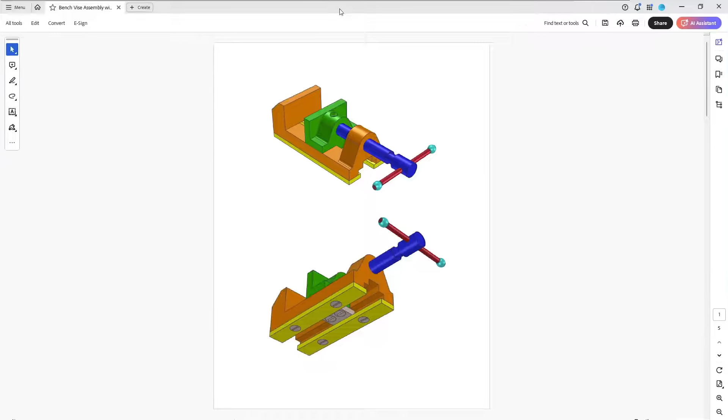Most of this is built in IronCAD without using any sketches, so we'll show you how to do that, and some things we will use sketches for, so we'll show that as well. This is a good overview video, and it's going to be fairly long since we're building each part piece by piece, showing you how it's done inside IronCAD's single scene environment to build it in place. Let's go ahead and get started, and I'll keep bringing this back and forth so we can see some of this.

First, let's start with our first part, the bench vise base here. We'll have some dimensional information that defines the overall size, the length and the width. We also have a chamfer in the back, and this component up here has some radiuses inside, defined by this angle value.

So we'll show you how we can do this in IronCAD. Let's move it over and put this onto another screen to use as a reference. The first thing I'm going to do is start with a drag and drop of our rectangular extrude here, and we can set the size of this—we know the overall length is 144, so we can just type in our values on our size box handles here.

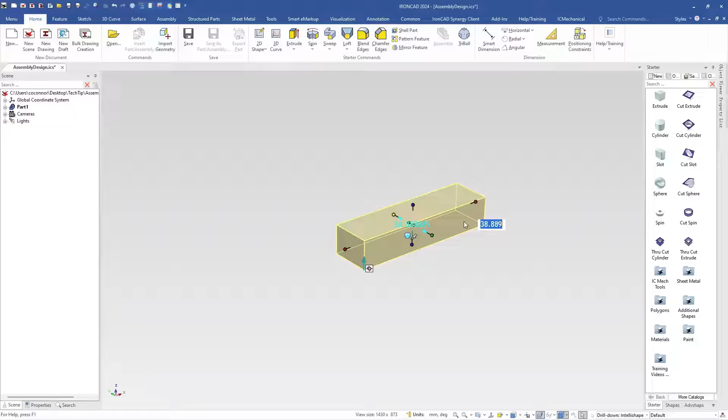These are our IntelliShape size box handles, and when you hit enter, it toggles over to the width handle, then to the height handle. So we're on the width now, and we know this has an overall width of 64, and the thickness of the base of this component is 16 millimeters, so we'll go ahead and set that as well. That gives us our starting point for our model.

Next, we're going to build this back piece here. We could again drag and drop another part, size it and snap it, but I'll show another alternative: we can select down to our face handles, where we have a handle that will start another feature which we can pull up and use all of our reference information, since we know we need to align to this back edge and to the sides.

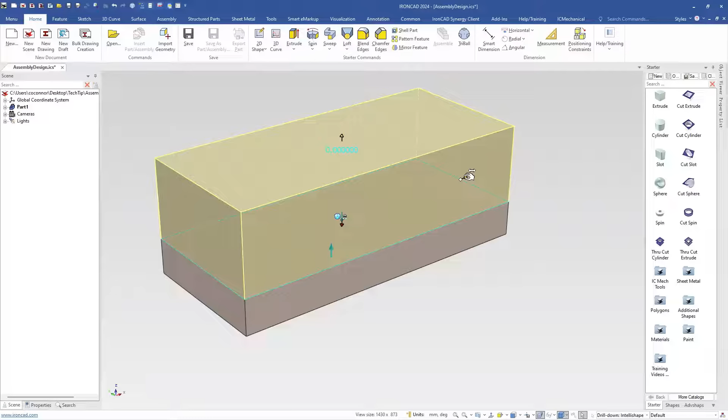We know the overall height of this is actually 36, so we can set that value, and we know our thickness is actually 26, so we simply edit the distance from point here and select 26. That gives us our second extension feature on our part.

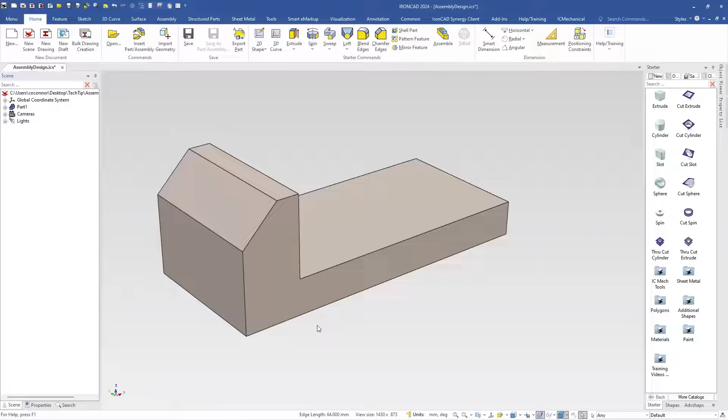We'll go ahead and add our chamfer to this, which is a 16 millimeter chamfer in both directions, so we can do a distance-distance. In this case, like I said, it's 16 millimeter and 16 millimeter. You can see the preview and hit enter to apply, and that gives us our starting point for our shape here.

The next thing we want to do is the component up here. A couple ways to do this—we can start with a cylinder shape, moving that up, and then adding some features, which is a good approach. So we'll go ahead and start with a cylinder.

We're going to snap it right here onto the center point, and we know it's going to go into this part at a thickness of 22, so we'll flip this to start off with and set the distance to 22. The diameter on that is actually 16 millimeter radius, so the diameter is 32 on that. And we know the height of this is going to be directly snapped to the same height as this.

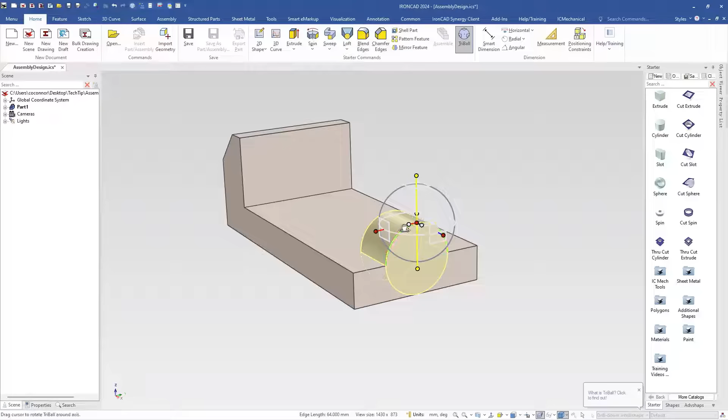So the top of this cylinder, which we're going to move using the TriBall, by just simply hitting our space bar, we can move this up to our top quadrant point, and then simply just snap this up to the top. That gives us our reference location for our shape.

Next, we can go in here, and our features, if you haven't watched some of our other videos, all of our features do have cross sections in there. So you can actually edit the cross sections by right clicking and selecting edit cross section, or hitting Alt E. It'll take you into the cross section mode.

What we want to do is draw our two lines here and put our angle information on this. So what I'm going to do first is lock this guy into position, so he doesn't move when I make any changes, and we can just draw our angles here.

To do that, we can just draw 2-point lines, or we can use another tool here, which is a tangency line. What we're going to do is draw a tangency line down through this point here, and we're going to trim those off and basically get our final line.

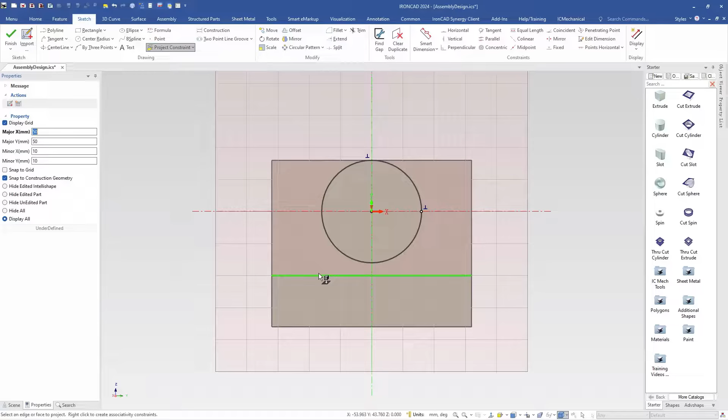So a couple things we can do. First, let's go ahead and reference this edge down here so we know how far to drag down to. And what we're going to do is draw this tangency again. We're going to select the arc, and we know we can just move this around to get whatever tangents we want.

We don't know the length of this, but we do know the angle for this thing, so we can right click and type in the angle for this. In this case, it's got to have a total of 50 on both sides of those from center to center. It's from this angle to this angle is actually 50, so it's just a calculation there. It's 25 minus the other side, so we're talking at 65 there onto that.

So then we can do the same thing onto the other side here. Again, we're on the tangent command still. We can pull that down, and it's going to maintain that. And again, we'll go in here. On this, it gave us that angle.

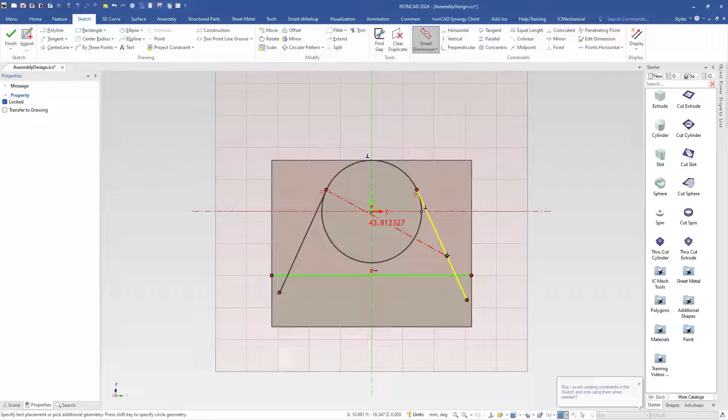So we're just going to put on the 90 plus 25 on that one, which is the 115 inside there. So if we wanted to get an angle dimension, we can put that on there to get the 50. If we wanted to put the lines down at whatever random angle, we could use a constraint dimension to drive those as well, so that's an alternative. But anyways, I'm just doing some math here to give our angles.

And now we basically have our shape, and we can just trim out what we don't need. So we're going to use the outer part of this geometry here, and get rid of all the extra lines that we don't need. And we're just going to hit finish, and that will give us our shape.

Lastly it had on there was a fillet on these corners here, and I believe, let me double check, that is 3 millimeters. So we're just going to right click, type in 3 millimeters for that, and we can come over and get the other side as well and enter on that too.

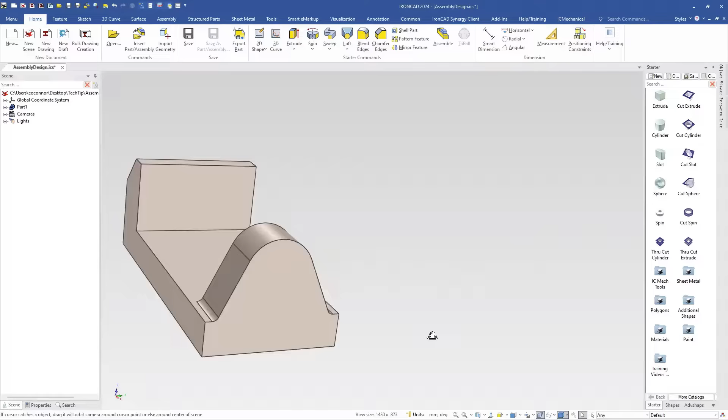So now we've got our base shape here for our model. One thing it does add to this is a hole here on the end, which has a diameter of 16. So we'll go ahead and drag and drop that out onto our center point. It has a diameter of 16 on that one, and we can leave it the length it is, or just snap it to the end. Either one will work in our geometry.

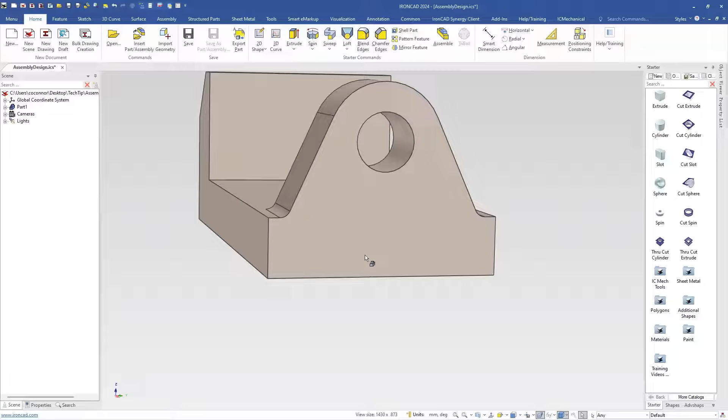So that gives us our starting point here for our model. Lastly, there is actually a cutout here on this end. So we can do this similar to the way we did this one, where we can drop a shape, edit the cross section, and make basically a two cut shape, or we can just use two drop features. For example, I'll just use an extrude cut. I'm going to drop right on the center, and that will get us all the way through our model.

I'm going to line up this bottom so I know my overall height. The first one on this is actually 7 millimeters high, and the width, if we right click, we can do a symmetrical sizing, is actually 32. So we got our first hole with that distance there.

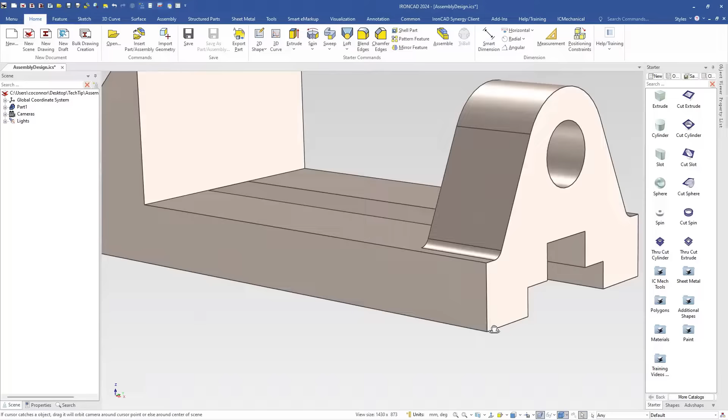We'll go ahead and add our next hole using the same extrude cut inside of here, and drag and drop that one on there. Again, referring to the bottom edge since we know the overall height is 16, we'll set that to 16, and the width on this one, symmetrically dragging with the right click, we'll set to 16 as well. That gives us our cut through there. So that's kind of the base of that model.

The last thing it adds is some holes onto this part, spaced out 38 millimeters from this end, and then 70 to the next hole placement. This is actually just a simple hole, and we can do this multiple ways. It looks like it's got a little angle on the bottom there. It doesn't give us information other than it's a 6 diameter hole, so I'm going to use some of our IronCAD mechanical tools.

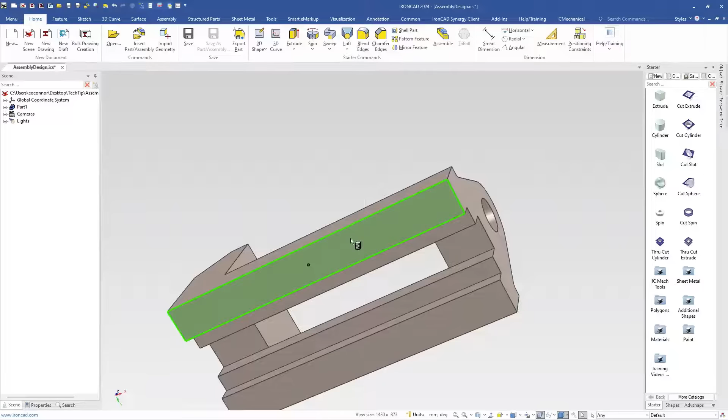I'm going to drag and drop this out, and again I can drop this anywhere. I can drop it onto this point here, and we're going to use a hole feature into this. This is going to be just a simple hole in this side, and again it's 6 millimeters, so let's put 6 millimeter inside of there.

If we want to have a flat hole we can do that, or we don't want this to be through, we'll set a depth instead. The hole depth on this guy is actually 10 millimeters, and we'll give an angle at the bottom, I guess we'll just leave 118. They didn't really give us any size there, so we'll use 118 as a default, but we have multiple different angles we could set, we'll just use that one as our point of reference. Once we've got that done, we can hit OK.

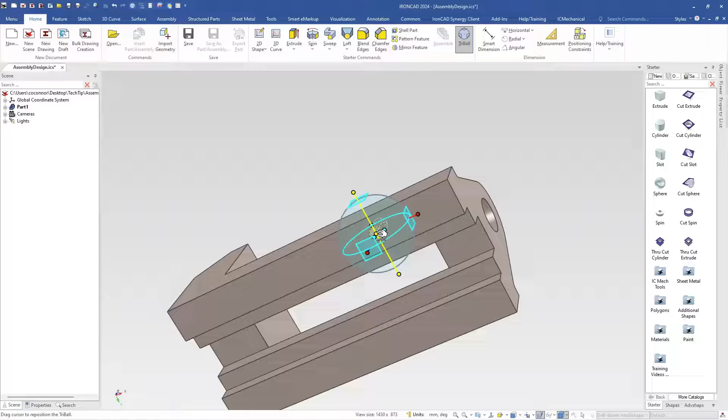Notice it already puts the TriBall on for us, and we can simply move this in 38 millimeters on that model. Since we dropped on the center point there, we're already on the center point of that face. But the reference dimension they gave us is actually 10 millimeters from this edge, and then 44 over there. So to refer to that, if we wanted to say how far are we from this actual edge, we're at 8, so we'll set that to 10 millimeters to set that offset. That is our location of our hole in there.

We'll go ahead and make another copy of this, and what we're going to do in this case is make a linked copy, so it's a linked reference geometry. If we make a change to one, the other one will change as well. It's got a 70 millimeter distance from center to center.

Next we'll select both of those holes using our shift key, and again we'll right click and drag this to make a linked reference of that, and it's got a distance of 44. So that's how we can create that base plate.

Using IronCAD's drag and drop feature, this is just a simple part design, and again this is our base, so let's go ahead and name that as our base part here. Next we're going to go ahead and build the next shape to this.

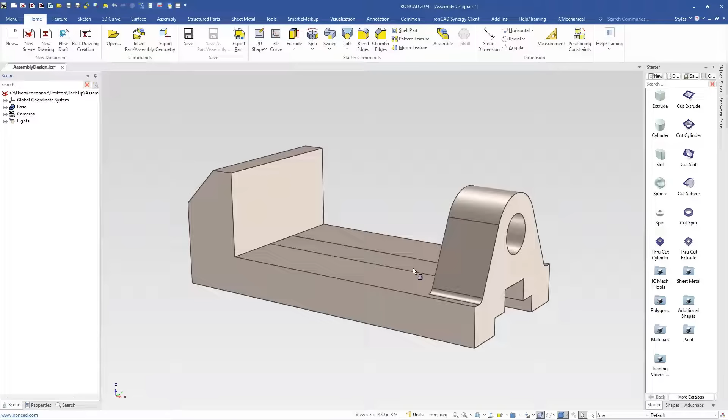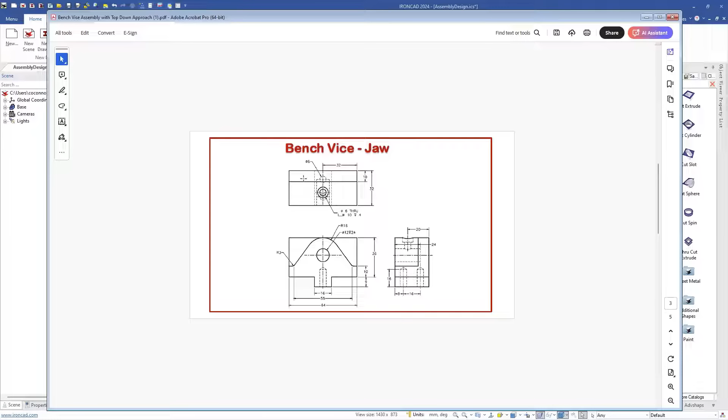We'll move this back over so you can see. We're going to go ahead and build this jaw feature inside of here, using a lot of the existing reference information and just adjusting some things to get that. So it's got basically the same arc shape that we had before, but it's got a flat plate back here on the back, and it's got a hole at the top and on the bottom of this part. Let's go ahead and move into that design.

What we want to do is reuse this existing geometry inside of here, and to do that we're just going to start a new extrude command, and we're going to create a new part right off of that face there.

The thickness on that originally is going to be 22, but the total thickness of this guy is actually 32. So let's go ahead and set it to 32 for the extrude distance here. There we go, hit OK to place that.

Now this is a separate part since we created that, and we can just use our triball here again to move it off, it doesn't really matter where it's sitting at this point. So we'll move this off that back piece so you can see these are two different parts. We'll go ahead and name it so we can distinguish them. This is the jaw here as well on that part.

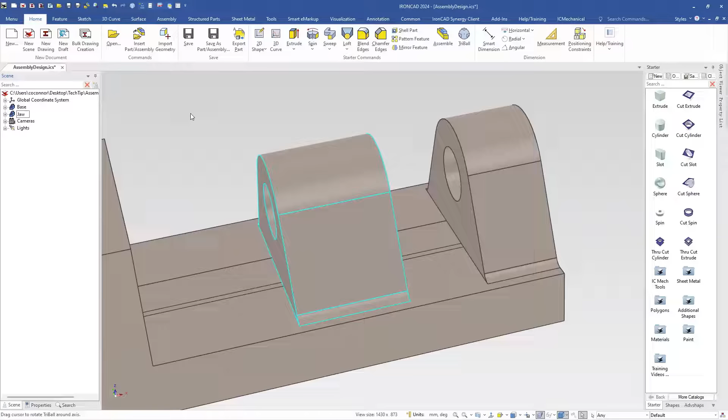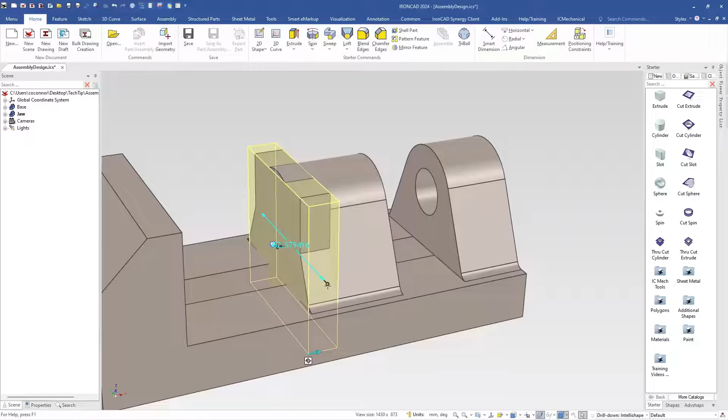One of the things it has, as I mentioned, is a flat piece on the back here. So what I'm going to do is drag and drop an extrude feature on here and flip it in the opposite direction, and it's got a thickness of 10 millimeters. Now the width of this is 64, so we can right click and drag this out, and it's 64 inside there, so it's essentially aligned up with our other part as well. So we're going to snap this up, basically create an alignment.

Now we've got that back piece here. The height of this object is 36, so again we can use our handles. It's probably the same height as the other one, so we can just snap, or we can type in 36 to be precise, either way will give us that. So now we have that shape there as well.

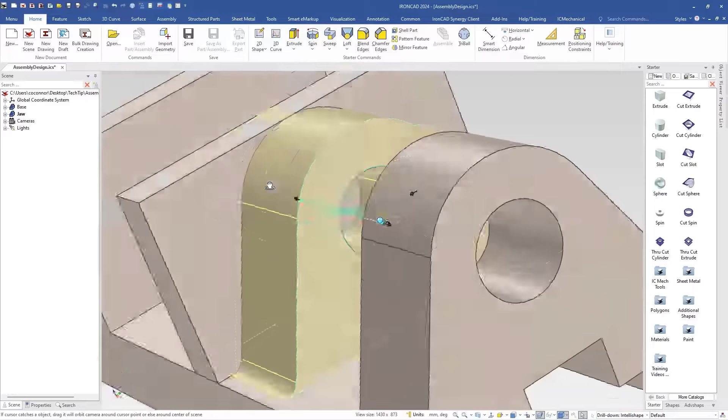This one's got the same diameter on the top, but a different hole. So we want to change this inner hole here, it's got a different diameter, so we're going to edit distance from its own center point, and it's got an 8 millimeter shape there, going to a 12 diameter. But we can't really edit this one because it goes all the way through to the back side. Let me cancel out of that. What I mean is it goes all the way through to our original shape, since I added this material here.

So what I'm going to do is get rid of this particular hole and drag a new feature onto it. To do that, I can edit the cross section by going into Alt E, and we can hide all the geometry so we can see our sketch. We don't need that hole, and we hit finish to get back to that. So now we've got it there.

Now we can drop our hole here that we want, which is going to be a diameter of 12 and a depth of 24 on this. So we'll go to our depth by hitting enter a couple times. There are back handles yellow, so we're driving that back one at a depth of 24, you can see that's 24 depth there. So that places our hole 24 deep at a 12 diameter.

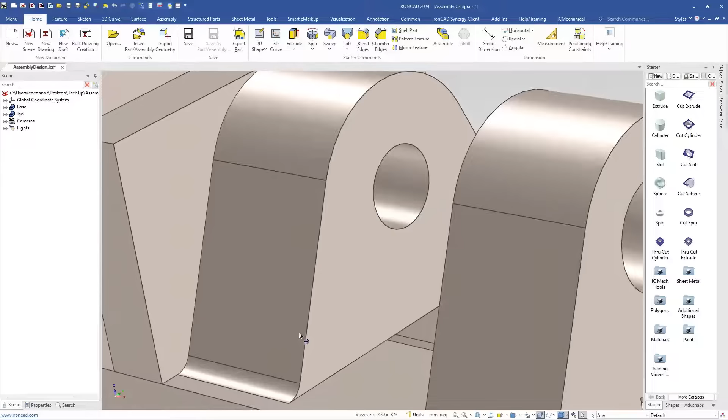These blends here are interesting. So our model, when we first built this, was off this face and went all the way down to the bottom face. In this case, we're actually going to add some geometry to this part, since it actually has a 10 millimeter base, and this is going to put the blend up here on the top. So we can either leave those there, cut it off, whichever one you want, but we're just going to add another base element to this.

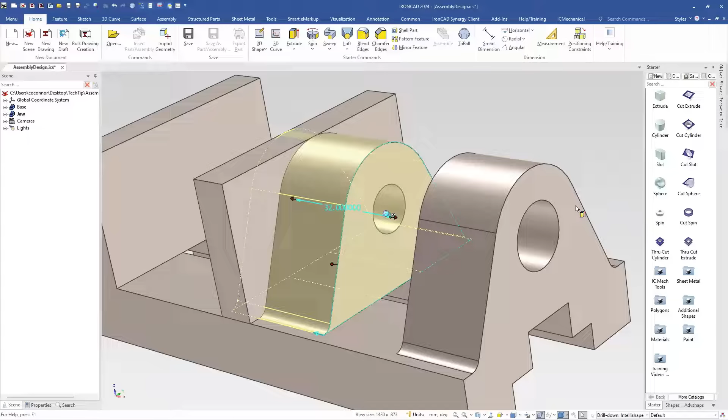Let's go ahead and drag and drop another feature. I'm going to put it right on the center, line it to the bottom, and set the height of that to be 10. The width of this is going to be aligned to here, so I can just snap to our side, and now I can pull these in to our models and snap to the existing geometry here.

We could have done an extrude like that and drawn a rectangle and extruded it, easy to do that as well, but we just did it a different way, and it didn't really matter to us. So we're just going to go ahead and put our blend on here again, it's got a 3mm blend on both sides of that.

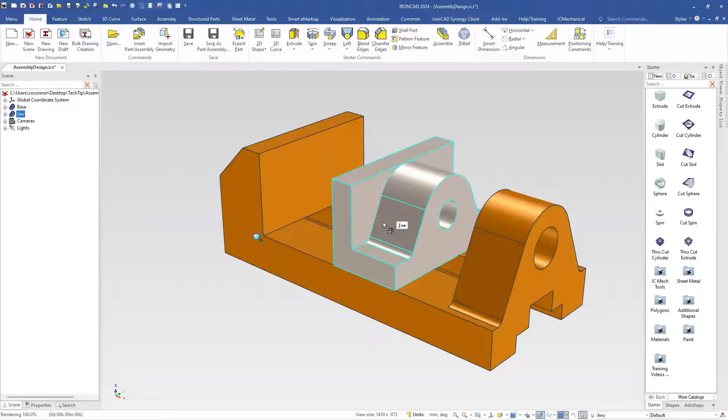And we can hit OK. All right, so now we've got that part. I'm going to change these colors a little bit. Now that I'm looking at this, it doesn't look so good to have them both the same. So our base part, I believe, is going to be an orange part here, and we're going to be working on a green here. Let's go ahead and change that one to a greenish color so we can see this a little bit better. Now we've got this model basically created here.

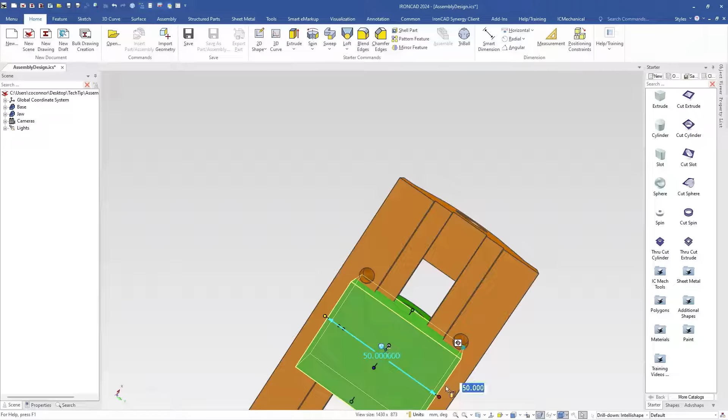We have a piece in the bottom that we need to build, so we're just going to rotate down to the bottom of this, and on the base of that it's got a 16mm wide slider here. So we'll just go ahead and drag and drop a feature right onto the side here, and it is 16mm wide, so we'll change that to 16mm, and we're going to snap it to the overall length of this model as well. So we're just going to right click and drag this in, hold our shift key down, and snap to that face.

There we go, so now we've got that set there. We just need to set the depth on that, which is 9mm. So we can go in here, grab our last handle, set it to 9. Okay, so that gives us basically our shape, and now we're going to put some holes on here.

So it's got 2 holes onto this shape. One from the front here that's 8mm back, then a 16mm inside of here. So let's go ahead and do the same thing that we did before. We're going to go ahead and use our mechanical tools. I'm going to drop that hole onto that center point.

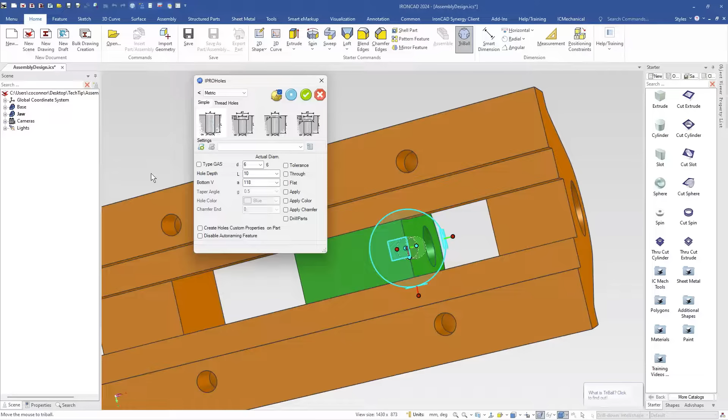In this case, this hole, let me find some information about these holes. I believe this is... yeah, I guess these are 6 again, a 6 diameter hole. The depth of those is 10 in this case, and again it doesn't give us the angle at the bottom, so we'll just go ahead and create that hole.

And again, this is going to be moved off at a distance of 8mm, and we want to create another one, a linked copy down here that's got a distance of 16 from that first one. So that gives us our 2 holes there on the bottom, and last, it's got a hole in the top here.

So the last one, this hole in the top, is going to be a counter bore hole. It's got a 10mm counter with a depth of 4, and a 6mm through hole. And the through hole means it's going through here.

So we can just set the depth here to the center point of this, which, you know, we've got a 12mm, 16mm, just move it to 16mm, we'll be cutting the hole through. So what we're going to do is just drag and drop again mechanical holes feature out here.

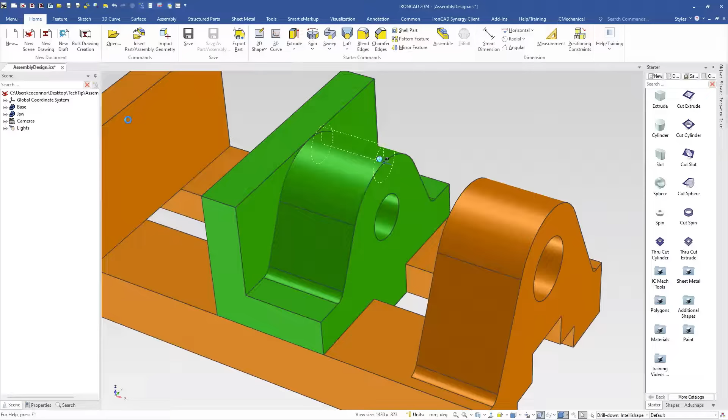I'm just going to drop it onto the center point here, then I'm going to move it after the fact. So we're just going to drop that, and it's positioning the wrong way, but we'll move it with the tri-ball, that's fine. So again, this has got a 6mm through.

That's going to be a depth of 16, and actually we're going to do a counter bore, so 16 inside of here, depth on that, and we're going to go ahead and set the counter bore. It's got a counter bore diameter of 10mm, and the depth is 4 for that. So we're going to just type in those values there: 6, 16, 10, 4.

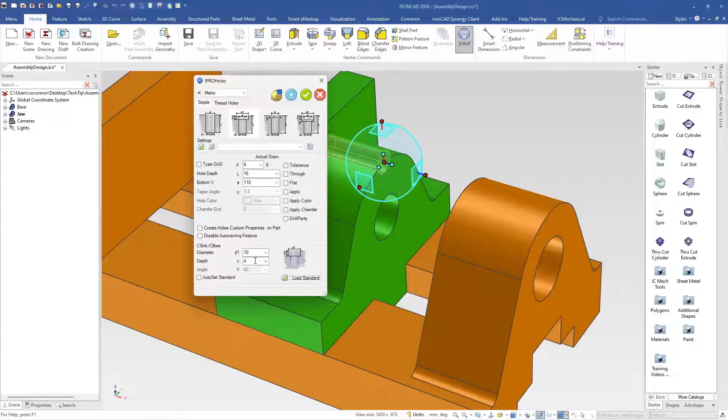Hit OK to apply that, and what we're going to do is simply rotate this over 90 degrees and move it in. In this case, it's got an offset of 20mm from the back side of this model. So again, we can just use our tri-ball at a distance from point from our back edge, that's going to be 20mm from there. So that kind of builds that part there for us.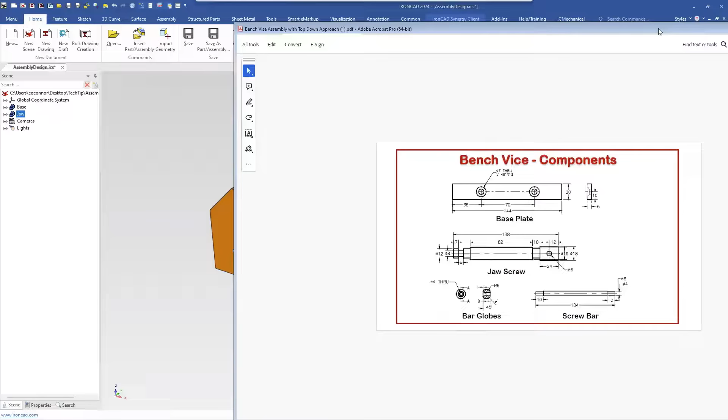So that's another way to build in place inside of IronCAD. We've got the 2 parts here, and next we'll just hop over to our next part here, which is some components. So we've got a couple different ones. One is these plates on the bottom that we have to build with some holes on them, and then we've got our bar globes and screw bars. So let's go ahead and start with the base plate. Fairly simple to do here.

Sorry, messing with my second screen. So let's go ahead and hop over to our bottom side here.

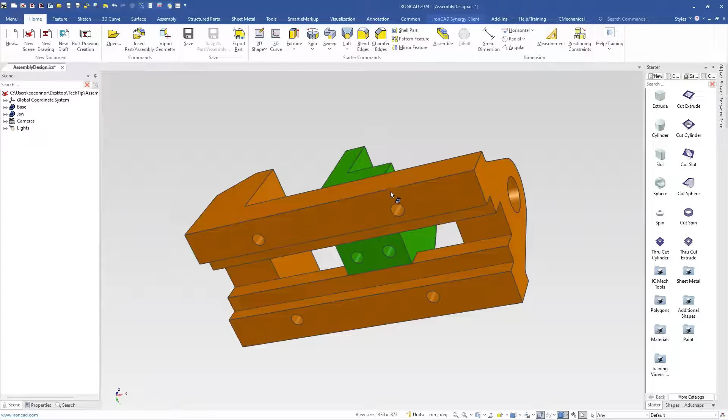We're going to use this existing geometry inside here, so we can reuse the holes if we want. In this case, we're going to modify these since there's actually a countersunk hole on it, so instead of reusing the geometry, I'm just going to drag and drop a new part out here.

I just drag and drop it on here, and notice that when I drop by left click, it adds it to the feature. So if we want a new part, we right click and drag and do the same thing. We say IntelliShape feature - oh sorry, wrong one - drag and drop and select drop as an innovative part.

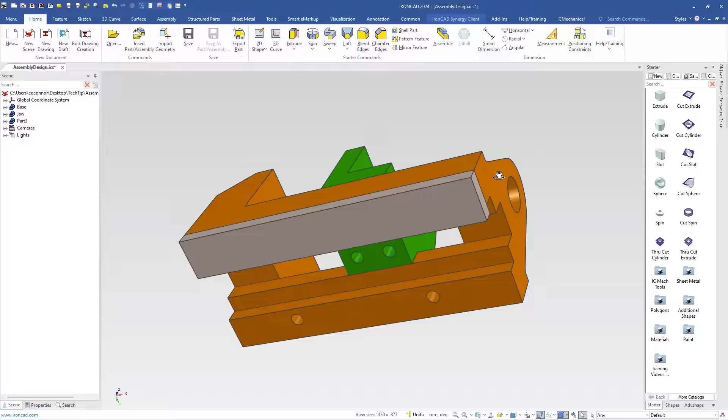So now we have a new part, and it comes in a different color so we know it's not part of that feature anymore. Now I can just use my handles to align this, and we know the thickness of this is 6 millimeters. We know the depth from this is actually 20 inside there, so it does extend beyond this inside there. That's why we built it separately to begin with.

Next we're going to drag and drop our holes on here to build this, and it's got a 36 and 70 spacing inside there. So let's go ahead and drag and drop that out onto our model. Does it give us any centers? I guess it's just in the center of the model, doesn't really matter.

So we're going to go ahead and do our mechanical tool, drag and drop it on here. Again, this one is actually going to be a countersunk hole inside here, and we know this is going to have a 7 millimeter diameter. It's going to be through on that, and we're going to set the angle and depth on this one. We need to know the angle, they say it's 45, so we want to set that angle to be from - in this case it would actually be a 90-degree angle on that - and the depth on that is 3 millimeters.

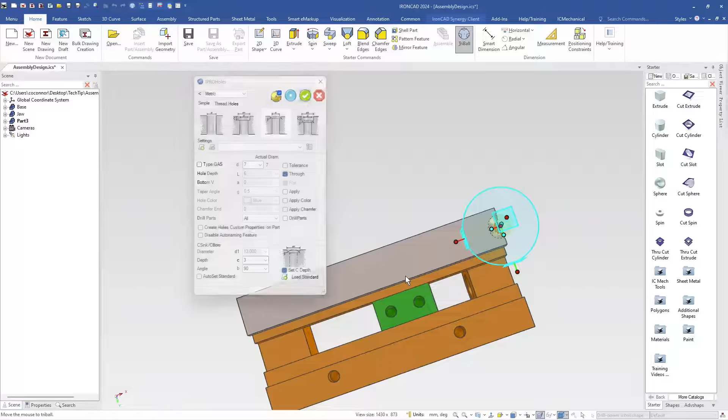So we're going to go ahead and set that for this, hit apply to place that, and then we can type in our values. We can just do the values here, or we can just refer to existing geometry. For example, I'll zoom in here a little bit so you can see this.

So what we're going to do is align to this hole, because we know this is the same hole on the opposite side. We can just drag this over, hold our shift key down to snap to that center point and move it there, so we're just moving that hole that exact distance.

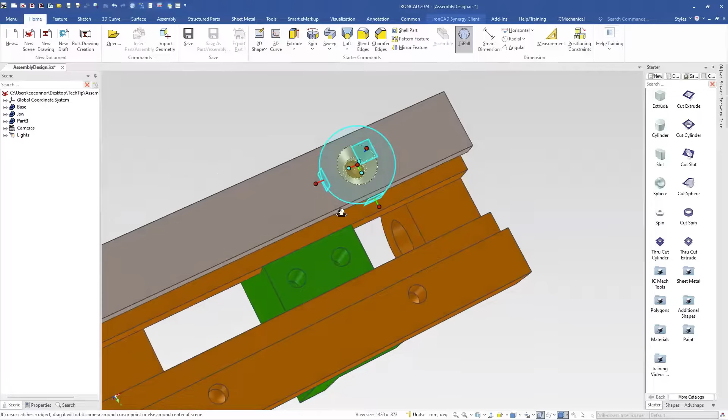Now we're going to do the same thing to the other hole. Again, we can right click, drag, get to that center point, or hold to the edge with the shift key to get that center point. This time we're going to say link when we right click and drag that - we're going to link that at 70, so that's the 70, and that was the 36 to give the first one. So we didn't have to type any values, we just referred to existing geometry to create that.

Next we need to create one of these on the other side, so we'll just make a mirrored copy of this. We can do that with a mirror feature command, or we can use our triad to position this here on the midpoint of one of these edges, right click on one of our orientation handles in the axis we want to mirror about, and make a linked copy to the other side. It's a very simple way to do that.

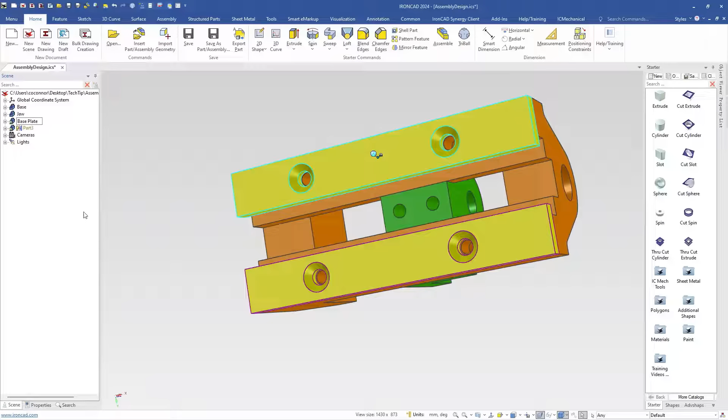Now we can select both of those and actually change color on those as well, make those yellow, and this is our plate. Let's go ahead and make that the base plate inside there. Since they're linked, both of them will update, and it also tells us that it's a mirrored reference of that part inside there. So now we've got our base plates on there.

We've got that one done, and next we are going to go ahead and do the jaw screw. I'm going to put the jaw screw out in space, and then I'll position it in here so we can build it and then move it.

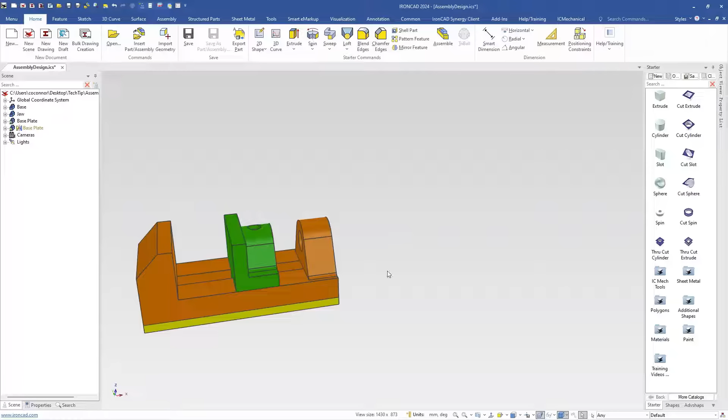Again, IronCAD is a single scene environment, so I don't have to have a new file. I can just drag and drop another shape out here. In this case, I'm going to do this jaw screw, and I'm just going to rotate it around so it's easier to see on our screen.

So we've got this here, so we know the overall diameter on this guy is 16 in the middle of this part. This is our jaw screw here. So we've got a diameter of 16 on the inner, and a bigger diameter out here. It gives you a bunch of diameters for all these and spacing for this, but not for this particular one, just an overall dimension. So I'll show you how we'll get to that shape to do this.

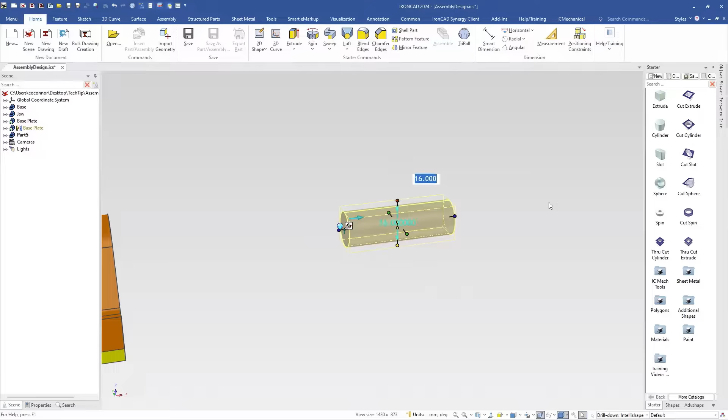So what we're going to do on this one is, we know the diameter on this one is 16, and we know the length of that center part is 82. So we'll go ahead and start with our base shape here. Let's go to the right first, and what I'm going to do is essentially just repeat what I'm doing: drag and drop to the center point, and set the diameter for these guys.

So the next diameter in is 12, I believe. Let's look at that. Yeah, 12 millimeter diameter, and the depth of that one is 10, so we'll set that. Next we'll drop another one on here, same thing, and it gives a diameter of 18, and the total length of this is 24. So that kind of builds that end of the piece.

Next we can go to the other end, and I'm going to go ahead and drag and drop that on there. Again, that one is 12, and we don't know the depth of this, so let's just go ahead and set it to 10 for now. So this is how we're going to calculate that one.

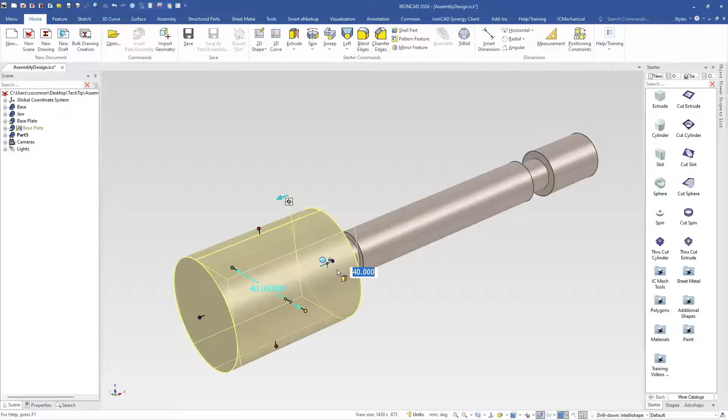Next we'll drop our next cylinder on here, and it has a diameter of 8 and a depth of 6. And we'll do the last one on here, back to our diameter of 12, depth of 7. Okay, so yes, you could have drawn this all in a sketch and spun it around. You can build it that way, but I like building it with these features because it's just easier for me to modify.

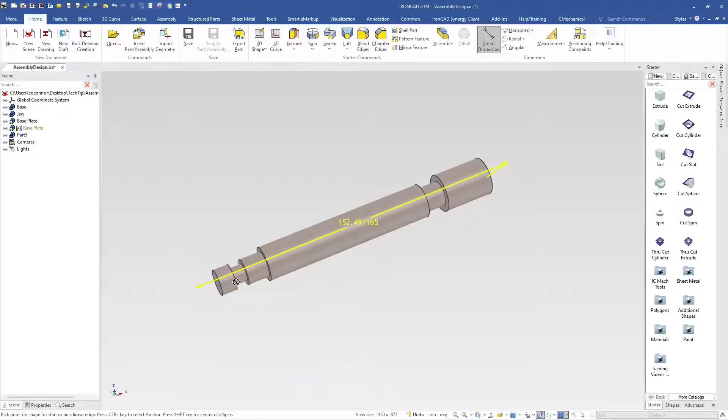So we know, in our case, we know the overall depth of this model inside of here is 138. So if we look at the model, we can go in here and just look and see where we're sitting. The way we built it now, the depth from here to our other side is actually 139, so the overall length is 138. So this one, instead of being 10, which is what we typed in, we just set it to 9. Now if we look at it, we're at 138. So that's just an easy way to adjust it, and since we built on top of these faces, everything moved in with it automatically. That's a nice way to build that particular part there.

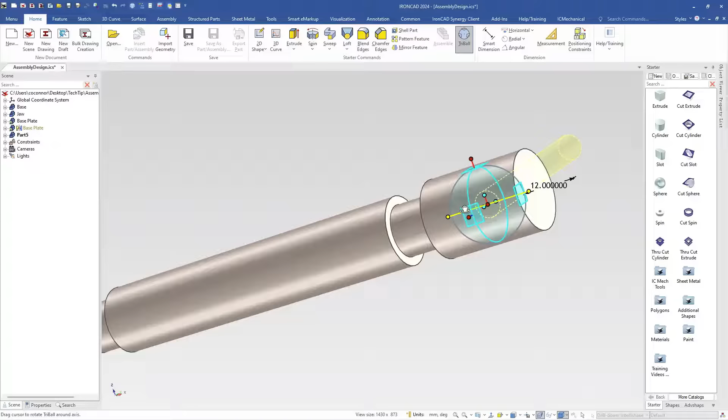Last, we need to add a hole on this on the side here. This is just a 6mm through hole. We'll use the same thing: since it's just a through hole, we'll drag and drop a cylinder on here, set the diameter to 6, use our tri-ball inside of here, and turn this 90 degrees, and move it in. This comes in from the back side, 12mm in, and we just pull it out with the tri-ball or pull with the handles, either one, it doesn't really matter. But now we've got our little through hole there. So that's all it takes to build that jaw screw, and I'll just give it a color as well.

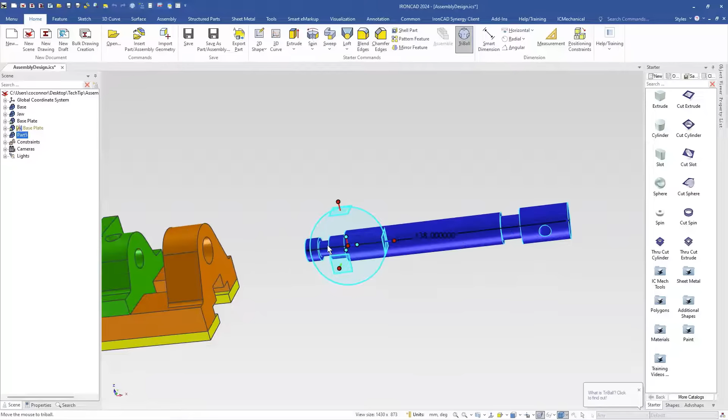So now we've got that one out of the way, we can go ahead and position this one because everything else kind of attaches to it. So if we want to position this, we can select the object and put the tri-ball on for this. What we do know is that this is going to probably be in line with this hole, the screw that's going to come through this hole at the top.

So let's just go ahead and move this over to our reference location. In this case, it's going to be from this edge. That was a 6mm, so we're just going to move it in 3 more millimeters to be in the middle of that part. So now we're in the center. If we look at this, we're in the center of our part, and we're at 3mm.

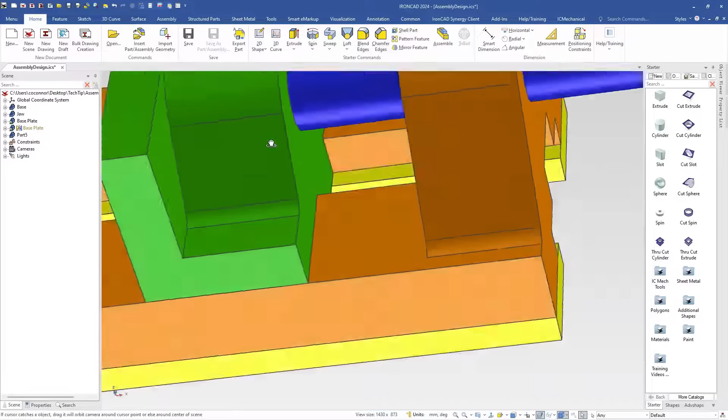We can now do 2 things here. We can tell the tri-ball by right-clicking on the center point. We go to center point of this part, so we're going to snap it right to that center point. Now I'm going to lock the axis so it only moves along this axis because I want it to be aligned here. So I can either type in that distance, or I can just right-click on the center point again and say to center point of this, and now it will put our part right where my tri-ball is sitting inside of this piece, right at that location. So that gives us where we need to be positioned for this model.

Okay, so now we've got that positioned, and again, this part is our jaw screw. So let's type that in there, jaw screw. There we go, we got it all typed in there. So now we've got that set.

So next, let's go back over to our PowerPoint here. So next we'll do the screw bar here. So a simple main cylinder, 2 small cylinders on the end. It's basically built the same way we just built the last one. So we'll start with our initial cylinder.

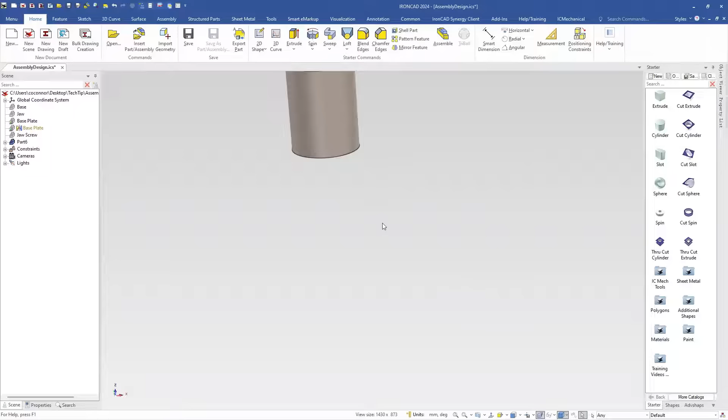So one thing you can do, just if you want to, I'll show you that here in a second. So if we drop a cylinder out here, one thing you can do is actually right click on this and say hide unselected. That just gives us our cylinder that we're working on. We don't have to see the other geometry. So it's a nice little way to clean up your workspace inside of here.

And we know this has a diameter of 6mm. The length overall is 104. So we're just going to type in 104 minus 20mm on each, or 10mm on each end. So that will give us our value.

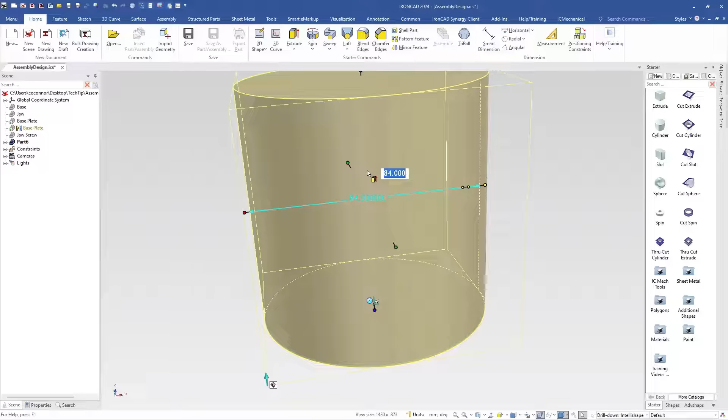Oops, sorry, I typed in the wrong one there. So this is actually 84 this way. This one actually is our 6mm. There we go. So wrong handle there, but anyways, you can just adjust the handles again. So it's again 84 for the length on the long side, and then our 6mm diameter.

And then we just drop our 2 10mm cylinders. So one thing you can do here when you zoom into IronCAD really close, notice when I drag and drop out here, this will adjust. So you can set a smaller shape inside of there. In this case, it sets it to 4.

We're going to set that to a 10mm. Sorry, actually that was a 4mm diameter. So let's go ahead and back. 4mm diameter is what we want. We want 10mm for the length of this thing. So let's type in our 10mm there.

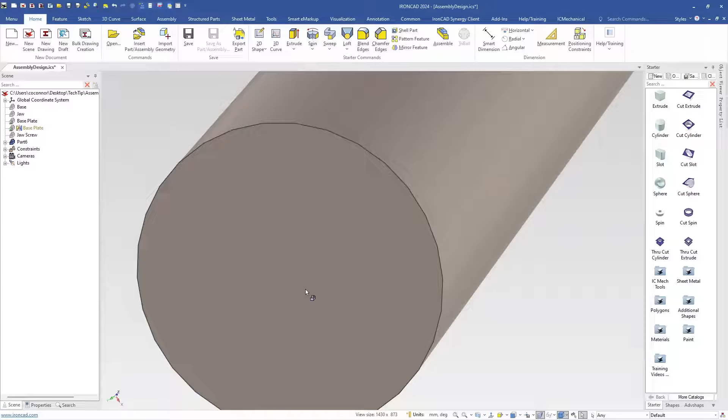And we can do the same thing on the other side. So go ahead and zoom in here. And so what it's doing is just resizing this down before, so I drag and drop onto our center point. So that's a precise center point. Hit OK. We got a 4mm diameter. Let's go ahead and set our length to 10mm.

So that's all it takes to build that piece, which is our screw bar here. So let's go ahead. Here we go. Sorry. So this is the screw bar. So we typed that in there as well for the part. So now we've got that part there.

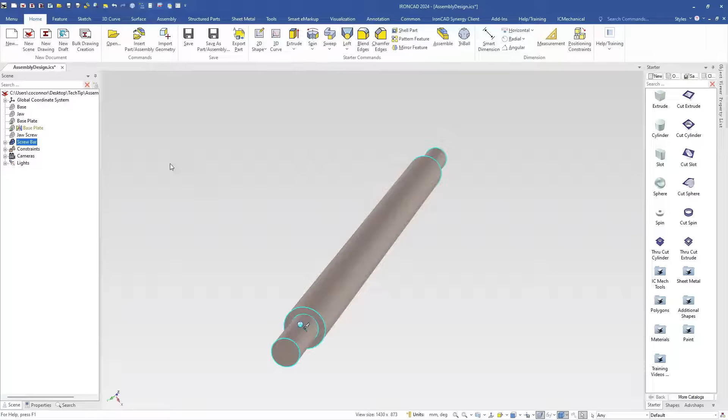We can give it another color as well. So let's just go ahead and give that one maybe a purplish color. Maybe that'll work fine. And then we can go back and right click and say show all. That will bring all of our models back.

We can see this one sitting out here in space, and we want to put it in the center of this part. So what we can do is turn on our shape. We know this was 84 here, so we can put this in the center by just moving our space bar up, or hitting our space bar to move our TriBall to white, so that we can move it. So that's just, if that was 84, so it's going to be 42 to get to our center point there. Now we hit our space bar again, and now we can move this.

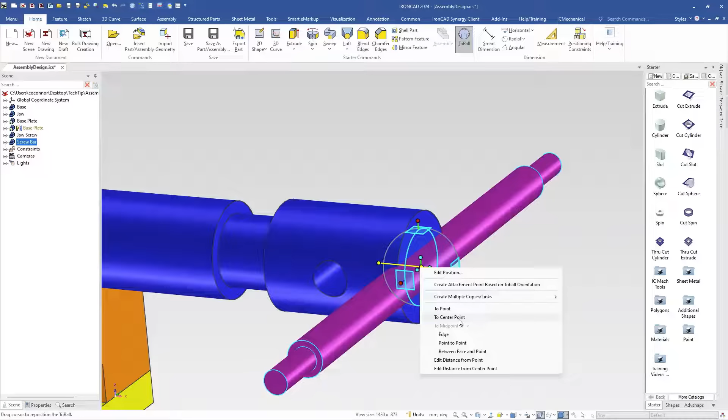So what we want to do is place this over to the center point of our shape, and then rotate that. I'm going to simply drag and drop it over here, and then I can rotate it 90 degrees, or use this orientation handle to align it to that axis. Then we can just move it over and snap to center point to position it right inside.

So you could have used a coincident constraint here as well. You could have done a concentric constraint from here to there to put that in the concentrics, and then put a dimension on here to position that. That's another way to do it as well. I'm just showing you some different ways that we do it in IronCAD than you would find in your typical systems.

So next, now that we've got that done, we need to do these called bar globes. Let's show you what those are - this little feature down here. It doesn't actually give us this height value, so we'll just make an assumption to build that. But essentially, we'll use a sketch to build this because it's a spin shape. So let's go ahead and show you how we're going to do that.

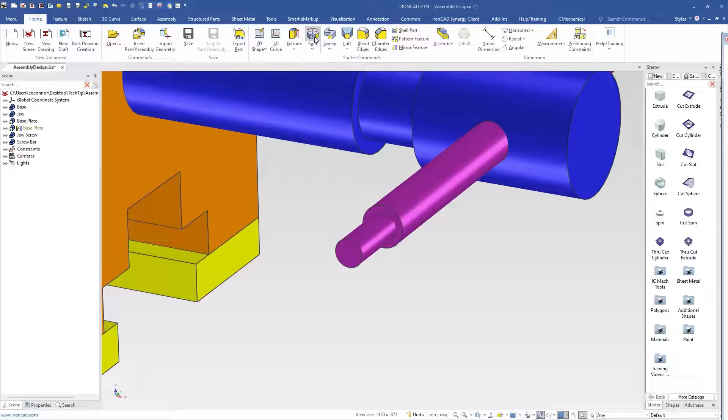So we can build this one in place if we like. We're going to go ahead and build a spin shape inside here, create a standalone part, and put a new section on here. We want to do it normal to this face, so we'll select this point, and put the origin point here as well. That's the way we want to spin this object around, and we're going to hit OK to get us into that command.

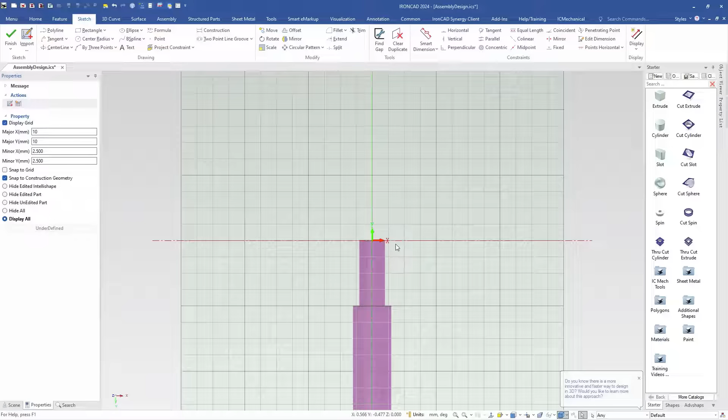So if we want to see some stuff, we can go back here and change it to display all so we can see what we're designing here. What we're going to do is use our rectangle shape, and draw this down - we know it's a depth of 9mm, so it's going to be 4.5. Actually 9mm this way, and then we don't know this value - this is the one we don't know. We do know this is going to be 9, and we're just going to make an assumption, maybe 3mm or 4mm, something like that inside there to draw this out.

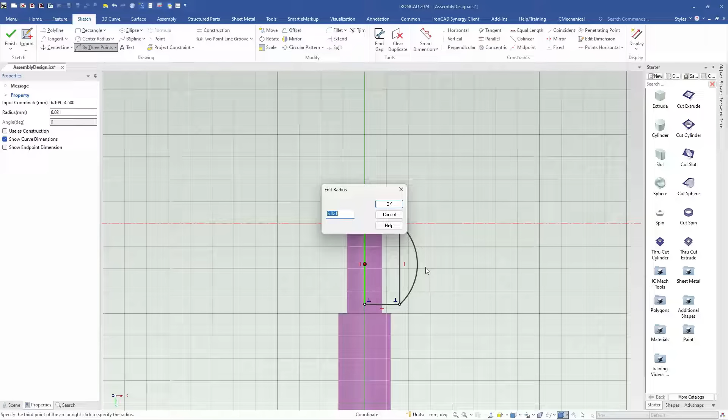So we're going to right click, and we know we want the width to be 9, and we'll set this one to 4mm. The next thing we know is that we have an arc that goes from here to here, and it has a radius of 6. So we're going to set the radius of 6mm on that, and then we can get rid of this inside line as we don't need that. So that's kind of our shape that we're going to do.

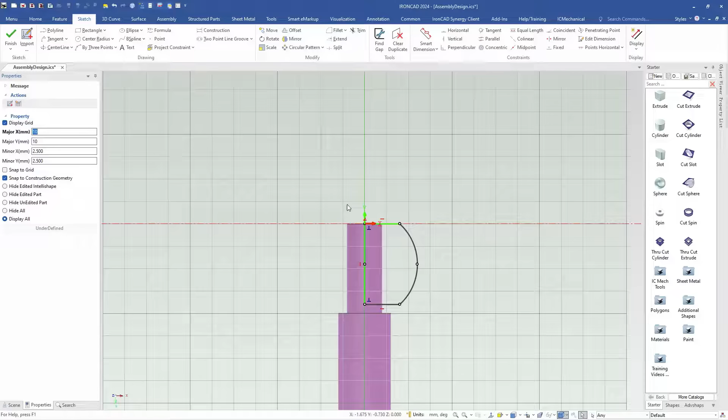We can connect these, or it'll do it automatically, but I'm just going to show you this - if you ever see red dots, you can right click to connect those points, or it'll do it when you hit the finish command. So that gives us our shape for our base shape, and we can go ahead and hit finish, and that will spin our shape around and give us our basic shape for our globe.

And now we need to add a hole to this. So to add our hole, we want to put a hole on here using the mechanical tools. You can try to pick the center point, but you don't know if it's picking that part or this part, so you can hold shift, or you can go in here and hide unselected to get to this part, in which we're going to drag and drop specifically to this part's center point. We're going to put a hole on that, and this hole, in this case, looks like a countersink - it doesn't really say. Oh yeah, this has a 45 on it, and it's going to be a through all, so it's going to be a through hole.

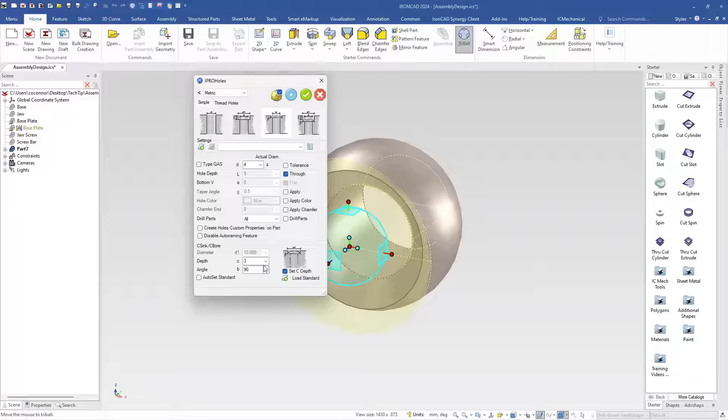It's got a diameter of 4 on the side there, and the countersunk value is 45. Again, that one will work for that 90, so it's 90 total, and its depth is 3. So let's go ahead and hit that to apply it, and that will give us our shape there.

And again, we can give this a different color. Maybe we'll put a different color here. I don't know, let's pick a light bluish color there. And we'll go back and hit show all to get our model back.

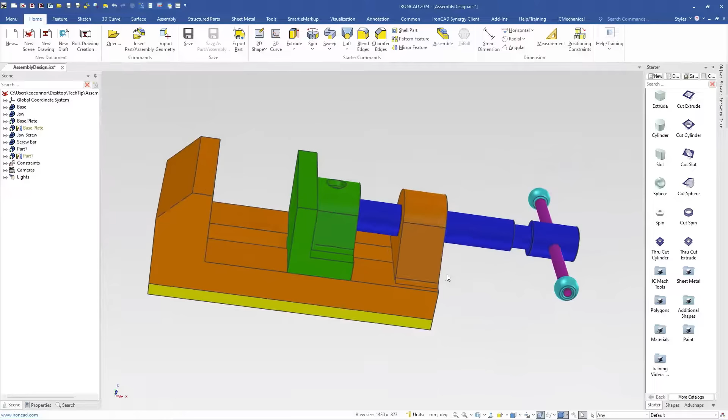So now that we have that sitting there, we can do a copy to the other side. So we turn our triball on here, and what we're going to do is hit our space bar because the anchor could be somewhere in space. So we're going to go ahead and hit position the triball. When we hit the space bar, we're going to position right to the center so that we can actually do that same option on the orientation handles, to mirror link the other side. Okay, so that's what it takes to build this model on the assembly side.

So last, we're going to go ahead and put the name for that one, bar globe, inside of there. Okay, last thing we have in the model is basically just some fasteners to tighten this down.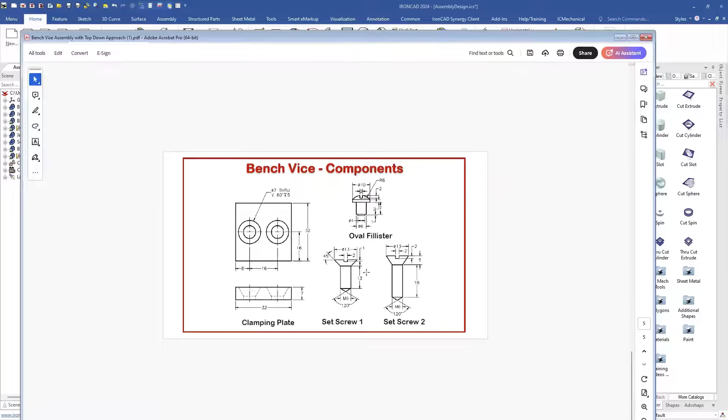There's actually one more little plate here. It's on the components, there's a little plate on the bottom that we'll build, and this is the clamping plate, and then we have some screws and another type of screw here that we can build as well. So let's go ahead and build these pieces here as well.

So let's start with the clamping plate, which is really simple. The clamping plate is what is going on here. So again, we can just right click, drag and drop onto the center point, start a new part here, and we know the width of this is 32 inside of there, and it's also basically just a rectangle, or sorry, a square here, 32, and then we have a depth on this guy at 7 millimeters as well. So that's our plate there, so it just kind of fits nicely inside the model.

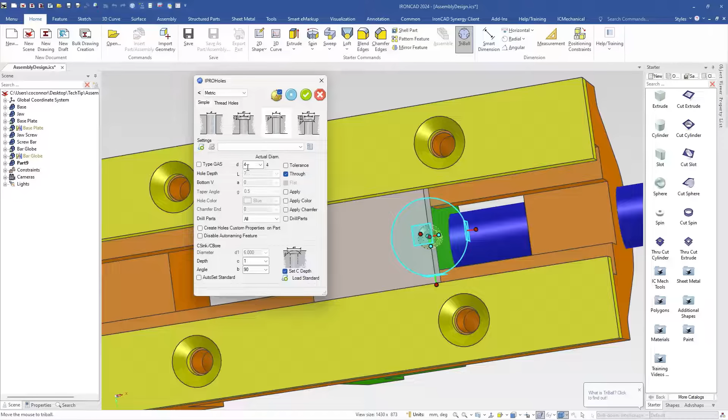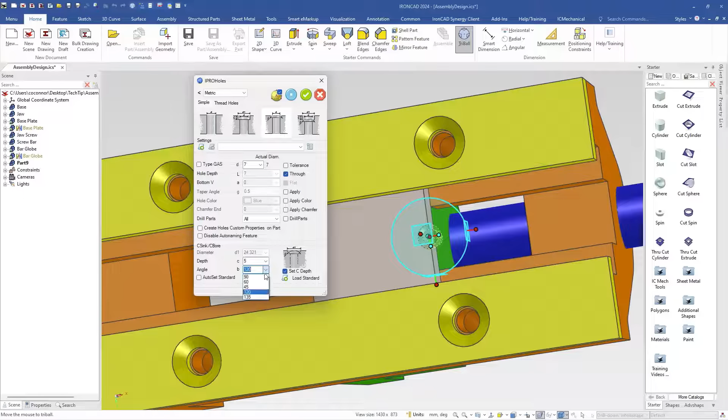Now it has a countersunk hole on the side of here. So again, we'll just drag and drop our mechanical tool on here, drop that on, put our hole. In this case, it is going to be a countersunk value of 7. Through is fine, and it's going to be a 60, and a depth - actually this would be 120 total there, and it's got a depth of 5 inside of there. Let's see, that's, no, maybe this actually is 60, sorry.

Set that to 60, 5 depth, and we've got a 7 millimeter. So let's go ahead and place that on there, and we know that that's going to be offset a value of 8 and 16. So let's see if it's 8 from here. Let's see, move here, 8. Yep. And then we got to make a link of that again. So we just drag the same handle, make a link copy of that at a value of 16 inside of there. Okay, so that's our 2 holes there at the bottom. So that's the clamping plate inside of there. If we want to name that one as well, we can do that.

Next, we can do the screws inside of here to basically populate these. So let's go ahead and do - let's see, I'm not sure where each one of these goes, so let's just do the ones for this first. So we're going to drop - we can go into our mechanical tools, like we can keep dragging this folder out, or you can go into it to directly drop out a fastener. Again, so you can drop directly onto geometry here if you like.

And inside of here, holding the shift key down, that should place us in the center of that part for us automatically. And what we're going to do is we have different types of screws inside of here, so we've got different screw types, different ones that you can select. We're going to go and select one of these screw types here. So this is one way you can build it. These are some of the standard ones that we deliver. So this one actually has a depth to the height, so this is one way to build the shape.

Another way is to build it using just regular features inside of here, but we'll just use this one from the standard inside of here, and we know some values on this. These are just your standard types, so this is an M6 screw. What's the length of that overall screw? So in this case, let's see, is that the length? Yeah, 18.

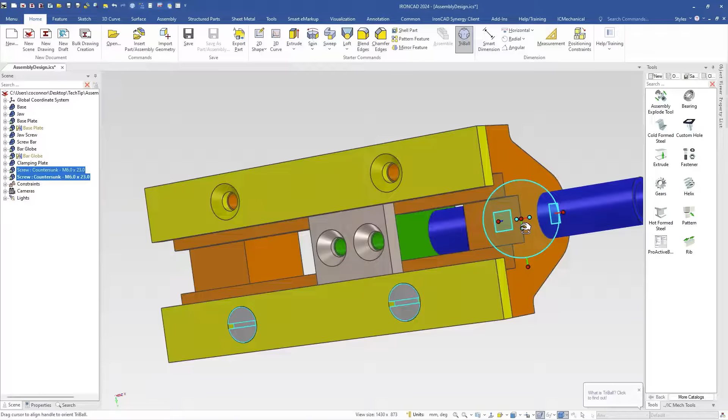When we drop down inside of there, do we want to copy that to all those? We'll go ahead and hit yes to link that to that other shape on the same part. We can also take this and move these and link these to the side using the same way we did the other one—hitting the space bar, mirror, and link it to the other side. So that's another way to do this.

Some things that I did notice in their dimensioning is they did want to alter this hole here. So if you look at this, we have the feature hole inside of here. We can actually edit that cross section of that if we want to, just to see what values they were using. So they set a value from this guy, they did set it from here. They didn't want that to be a 2 inch or 2 millimeter hole here, so this is to do it on both.

We set that hole there. The depth is already set to 2 millimeters, so that's fine. Or we can just use a TriBall to position it if we want. It's sitting at the bottom of that face right now, so if we wanted to know what's the depth of that hole, we can set that as well from here. There we go—oops, sorry.

We wanted to edit the distance from there, so if we want to edit distance from point, we say we want to set that distance 2 millimeter down. From there, we can do that as well. And so make sure we extrude the forward condition through the part. There we go.

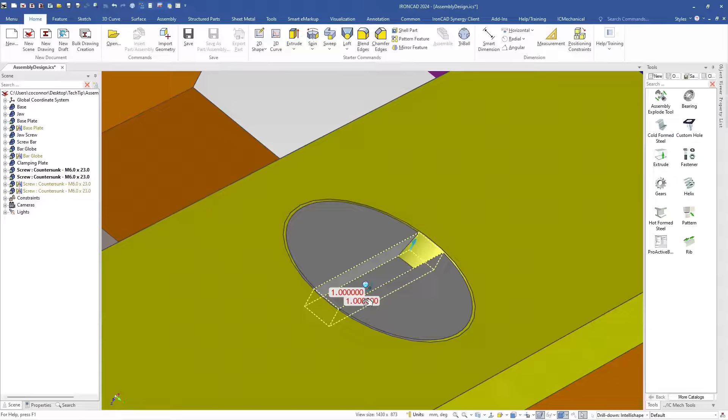Now we can set that depth from this top face, 2 millimeter. So we can just alter those fasteners that we use, and since they're linked, they all updated for that. So that is one way to do those holes inside of there.

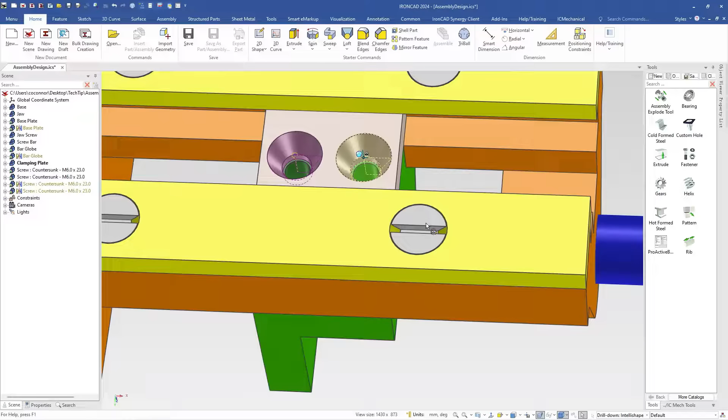And I think I might have used the wrong holes for these. I think that one was—these were the 5 millimeters if I recall. Yeah, those were the 5 millimeters. So these actually should be down here. So let's kind of save ourselves here. We'll just put this into a catalog for now, and we'll just drag and drop it out, holding our shift key down to there, and say yes to position that one there.

So this one, these four, these are a little bit different. So it's the same M6, but it's got a different value. So let's modify that, go back to its add-on properties. It might break the links on this, which is okay. We'll just copy these again.

So again, this one was 6 millimeter. Actually, the depth on this one is 14 in this case, and cone bottom is fine. Hit OK to adjust that one. So that will give us the update for those as well.

Inside of there, we can adjust those holes as well if we need to. So that gives us all our holes for our countersunks inside the part. The last one that we need to build is this oval one, so we can use one of the existing ones or adjust, build it manually inside of here. Let's see if we've got one of these inside of here. So let's go ahead and drag and drop a fastener out inside of here. In this case, let's see, we got a good shape that would use that.

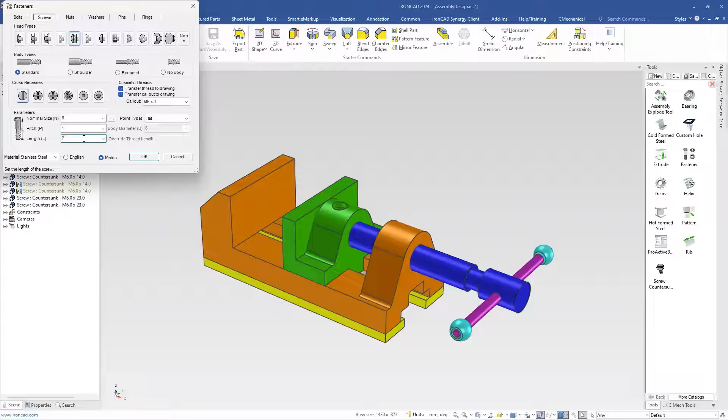Yeah, it's sort of like this shape here, so let's just use that one. It's got a cut through it. We know the depth - let's see, the diameter is a 6 again, so it's a 6 millimeter diameter. The depth on this one, let's see, we got a 7 millimeter depth, and we'll say a flat bottom on that as well. So this is one way to build this shape.

Using that, we can adjust these as well. So you can go back to double click those to get that, or you can go into the cross section here again to adjust these things.

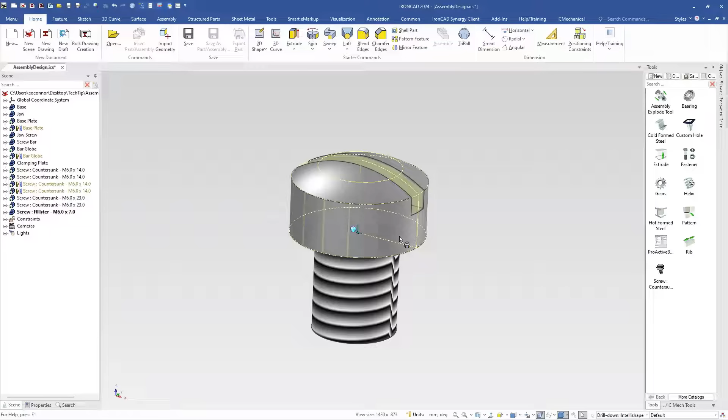If we wanted to adjust this up, for example, they have a certain depth. I think it's 4 millimeters from the top. So if we wanted to edit that cross section, we can adjust it here. We can see what our length of this value is - in this case, this is 5. We want to set that down. Total is 4 millimeters, so we can set that 4 millimeters to adjust that up there for our part.

So that's one way to modify that inside of there, is just to do that. And then we can modify this one as well, edit its cross section to basically move it up to our part here. So we just snap that up there, hit finish to adjust that. So that's just one way to adjust that.

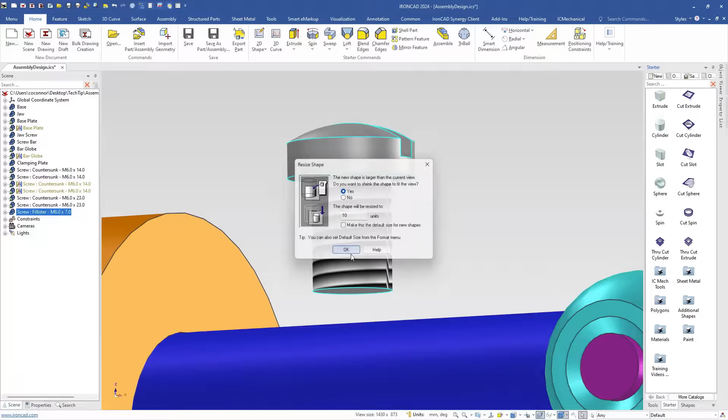Last they did is a little bitty cylinder on the bottom, so we'll just add another cylinder, going back to our regular catalogs here, and we're just drag and drop a cylinder here to the bottom. We're going to set the diameter of that guy to 4 millimeters, and it's got a depth of 1 on this one. So we'll select our bottom handle, set that to 1 inside of there. That's kind of basically just kind of to set the screw here.

So now we can just place this in place. Again, so our tri-ball, we want to set it down at the counter here. So let's make sure that our tri-ball is at the bottom of our part here. Now we can just go ahead and move this to the center point of that edge there to position that. Okay, so that's basically all it takes to build this in IronCAD.

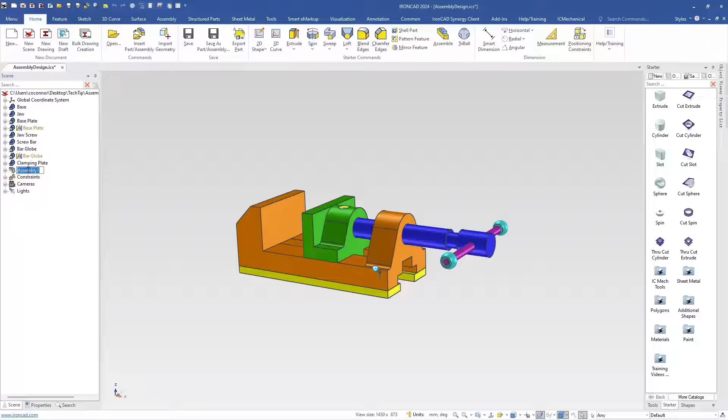So again, these are all parts. And again, now if we want to make assemblies, you can make multiple assemblies. We can select all these inside of here. So let's, for example, just put all our screws in an assembly. We'll just select those, hit S - that's our assembly command there. So let's say that's our assembly for our screws inside of there.

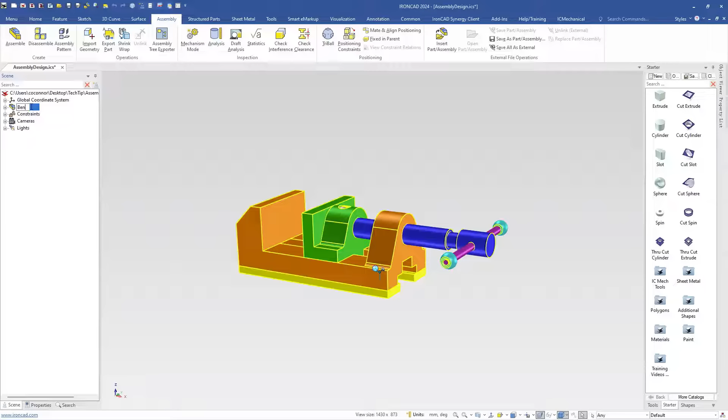And then we can come in here and select our other parts, if we want to make a base, or just select everything together, holding Shift key. Again, I'm holding the S key to hit assembly, or you can go to our assembly menu here and select assembly as well. And this is our bench vise, so we'll just type Bench Vice, and that is how you can design and assemble this in IronCAD.

So we just build in a single scene and just quickly assemble and disassemble again. So if we wanted to make an assembly here and then decide we don't want that assembly, we can quickly disassemble as well. Very easy and free form to change your assembly structure in IronCAD for your needs. So this is our model built from the bench vise components from the dimensions that we have.

So anyways, this is using IronCAD's standard features - again, regular starter catalog that we're using. All of the features are extrude cylinders inside of here, cuts, anything like that. And we also use some of the IronCAD mechanical tools for fasteners and holes inside of our part. We can also use just regular tools to start off with as well - it's the same as our IronCAD mechanical, but a little bit more flexible to edit those individually.

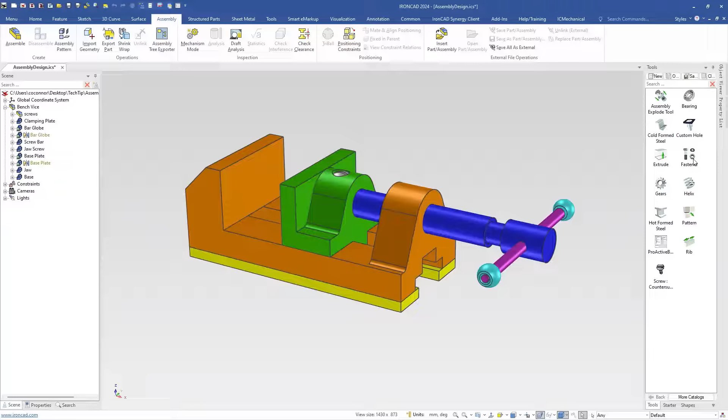So hopefully everybody enjoyed this. This is just a sample model, how you can design in IronCAD in place for assembly design. Thanks for watching.